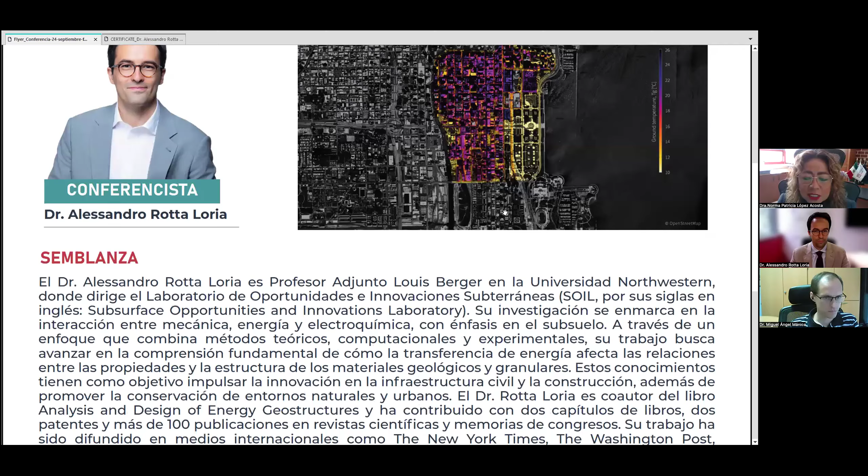I will read the bio of Dr. Rotta Loria. Dr. Rotta Loria is Associate Professor and Louis Berger Professor at Northwestern University, where he leads the Subsurface Opportunities and Innovations Laboratory, or SOIL. His research is framed in the interaction between mechanics, energy, and electrochemistry, emphasizing the subsoil. He combines theoretical, computational, and experimental methods.

His work is looking for an essential understanding of how energy transfer affects relationships between the properties and the structure of geological and granular materials. This knowledge is intended to drive innovation in civil infrastructure and construction, in addition to promoting the preservation of natural and urban environments.

Dr. Rotta Loria is co-author of the book Analysis and Design of Energy Geostructures. He has contributed two book chapters, patents, and more than 100 publications in scientific journals and conference proceedings. His work has recently been spread out in international media such as the New York Times, the Washington Post, Financial Times, Scientific American, CNN, BBC, United Nations, Forbes, and New Republic.

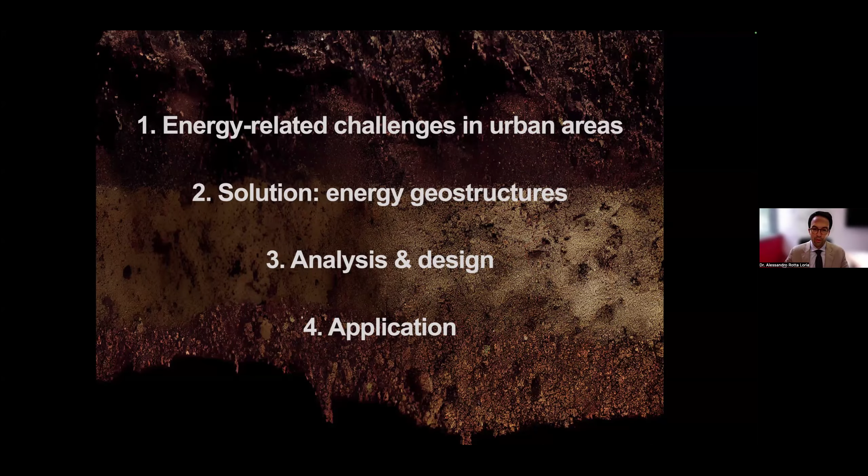So starting with energy-related challenges in urban areas, the message is the following. So you all know that, as a result of rising global population, we need more and more energy. What you may not know, though, is that most of the energy that we actually consume in buildings is for space heating and cooling and hot water production. In fact, depending on the country, from 40 to 70 and even 80% of the energy that we use in buildings is actually used for heating, cooling, and hot water. In the context of Chicago, where I live, as a matter of fact, this percentage is 70%, so even more than 60%.

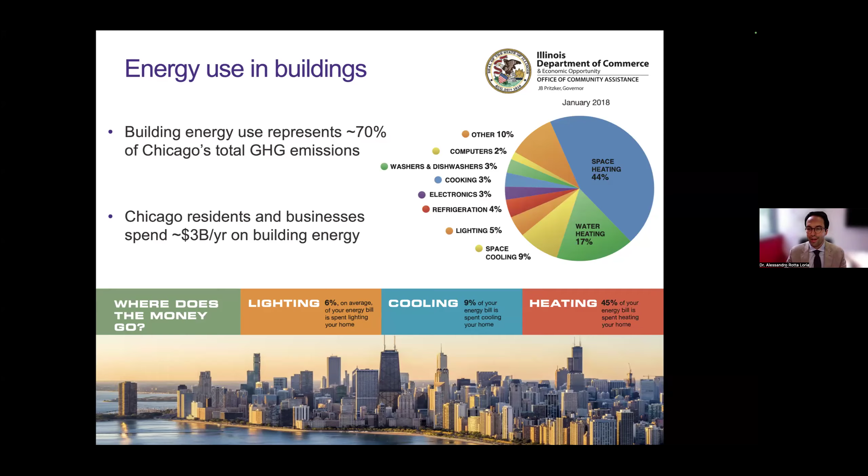And the current practice is problematic because essentially all of this heat typically comes from non-renewable energy sources, and that has as a direct consequence the generation of CO2 gas that then leads to global warming and climate change. Now, of course, we can produce heat with electricity, and so this is why we are trying to electrify our world. But as a matter of fact, if we could use directly heat, it would be a much more efficient way to meet these thermal energy needs. And so the first remark that I would like to convey is we need substantial amount of energy, and specifically thermal energy, typically above the ground.

Now, if you look at what we have underground, I'm used to showing these two posters, which I think exemplify very well the concept of geothermal energy, and the concept that essentially beyond a few meters of depth in the ground, the temperature remains relatively constant throughout the year. So these are two posters that were designed by Frederick Herrick for the London Underground, for the Tube, the metro system in London. And back in the 1920s, they were showing how during the hottest days of the summer, it is cooler below. And during the coldest days in winter, it is warmer below.

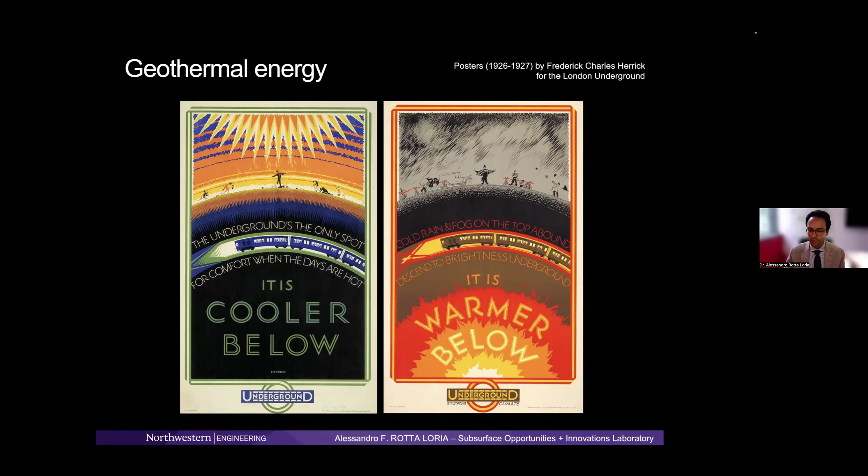And really the message of these two posters is that the temperature in the ground remains relatively stable throughout the year. So it is warmer than the mean temperature during winter and cooler during summer. And this is a reality that you can find everywhere in the world, in principle. So if you dig a hole underground, you're going to find a relatively stable temperature with depth that is going to be approximately equal to the mean annual surface air temperature. For instance, here in Chicago, the annual surface air temperature is approximately 11 degrees Celsius. And so if you dig a hole outside of Chicago, at least, you're going to find 11 degrees Celsius.

Where I was living before, and where I obtained my PhD, in Switzerland, in Lausanne, for example, the annual surface air temperature is 13 degrees Celsius. And if you dig a hole underground, you're going to find more or less 13 degrees Celsius, and so on and so forth. In Mexico City, very likely you're going to find a higher temperature because the average annual surface air temperature is going to be higher. So the concept is that despite the actual value of temperature changing depending on where you are, what does not change is that this temperature is relatively constant throughout the year. And so this is really the operational principle behind all geothermal technologies.

Now, what I just told you is a reality, it's a fact, it's true everywhere, except nowadays if we consider urban areas. Because in fact, when we are in urban areas, nowadays we find so-called temperature anomalies. And so the idea is that as a result of anthropogenic activity, and specifically as a result of the operation of underground infrastructure, the braking of trains, the presence of urban commuters, and the presence of heat sources, the ground beneath cities is warming up. And so this is the so-called phenomenon of subsurface urban heat islands.

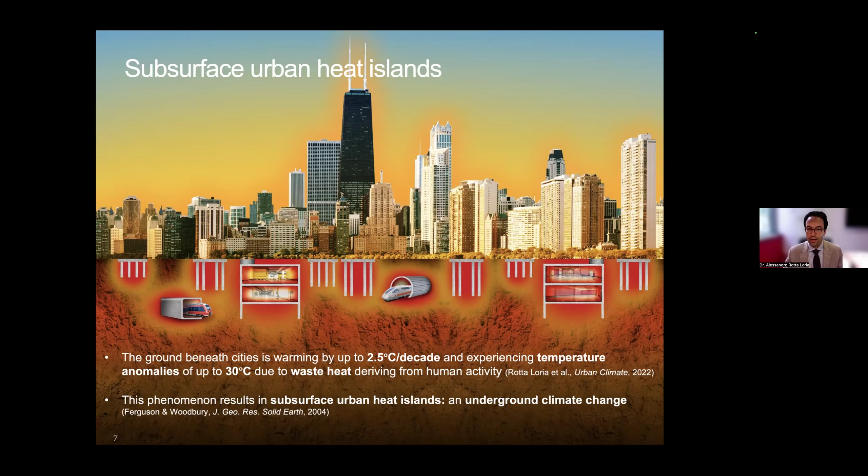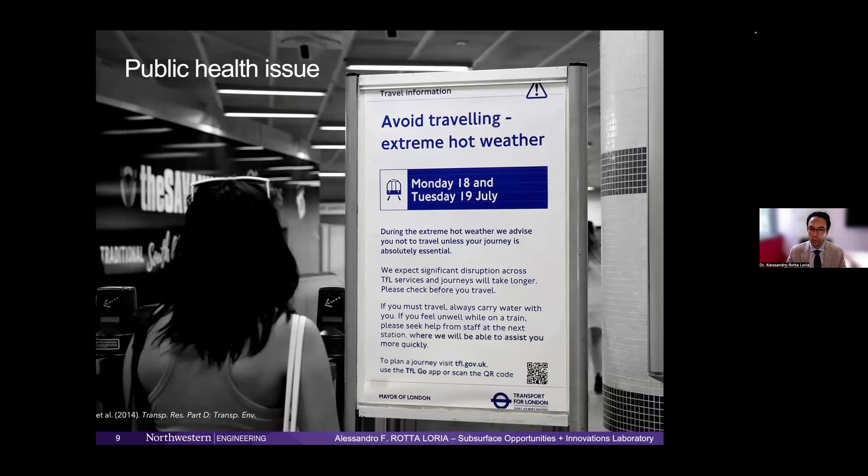Now, underground climate change is a recognized environmental issue because in a number of cities, it's affecting the environment by influencing seed germination, plant growth, and affecting biogeochemical cycles. It is also a public health issue because, for urban commuters, not only can they experience thermal discomfort, but they can also experience heat-induced diseases such as asthma and heat-induced stroke. And there are recorded cases every year about this influence of extreme heat underground on urban commuters. It is also a transportation infrastructure issue because it can be so hot underground that oftentimes the rails of trains can be at the onset of buckling.

And so basically trains need to slow down or even stop, with costs associated with delays. And also heat can lead to an accelerated aging of infrastructure. But despite these renowned consequences of this extreme underground urban heat, before my group and I started to work in this field, we didn't really know what the effects of underground climate change on civil infrastructure, for example, on geotechnical structures, could have been.

Now, the idea is that, as you might expect, geomaterials, so soils, rocks, and concrete, in general, when they are heated up, they expand. And this is kind of what we would expect rationally. However, in soils specifically, fine-grained soils under normally consolidated conditions, for example, or under particular conditions, they do not expand upon heating, but they contract.

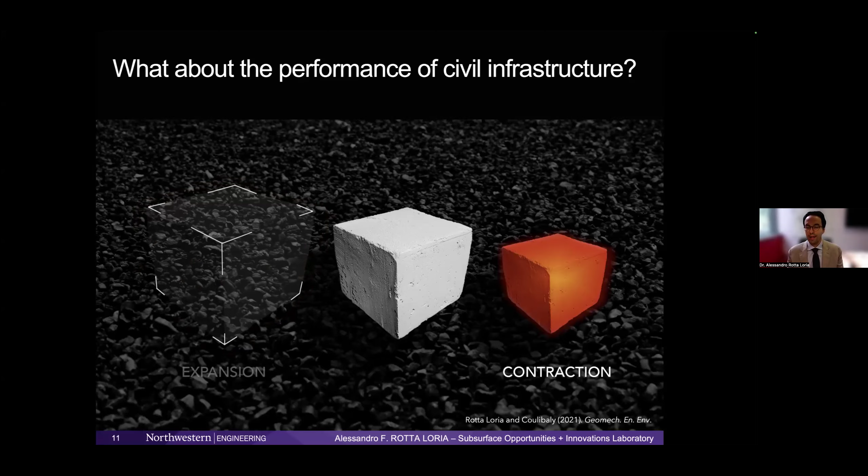And this phenomenon, which has been widely studied in the literature, is oftentimes called thermal collapse. So the idea is that when a fine-grained soil is heated up, instead of expanding, it actually shrinks. It volumetrically shrinks. And these contractions are actually irreversible in nature. So there are plastic phenomena associated with them.

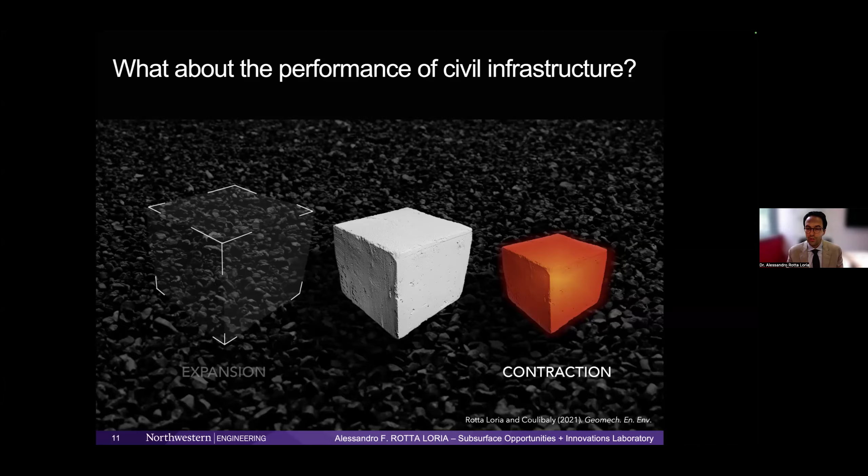And so really, the question at the time was, what's the influence of urban ground warming? What's the influence of underground climate change on the performance of civil infrastructure? So how large are these deformations, and can they represent a problem? So we started to work in this field, and we essentially studied this problem with a focus on Chicago.

And it turns out that underground climate change can represent a problem on a case-by-case basis for the operational performance of civil structures and infrastructures, including, of course, geotechnical structures. And so while we shouldn't be concerned about the safety and the stability of the structure, so we shouldn't be concerned about achieving ultimate limit states, there can be situations where we may actually achieve serviceability limit states, and so states which are problematic for the function and long-term durability of structures and infrastructures. Now, let me be more specific about all of this.

So essentially, what we did as a part of this work was to use Chicago and specifically the Loop District, which is the downtown area of Chicago, as a living laboratory. So due to the proximity of Northwestern to Chicago, essentially the idea was, let's use the Loop District as a living lab, and let's study, first of all, the presence of an underground climate change beneath Chicago, and second of all, whether this underground climate change might have led to substantial deformations.

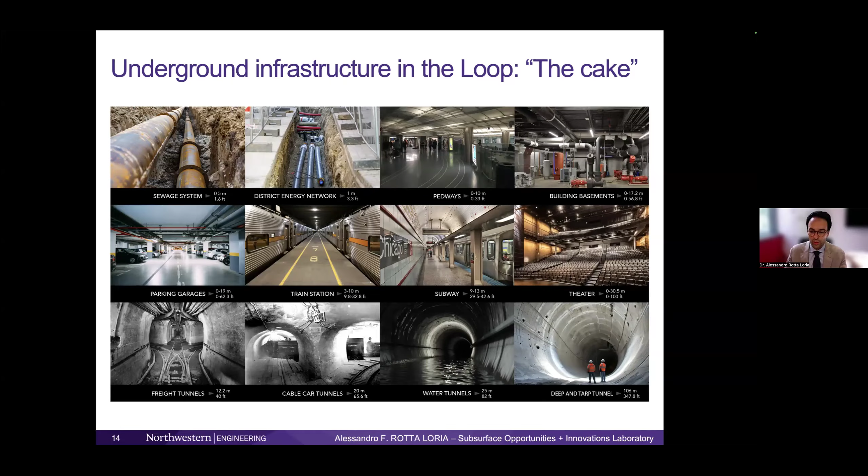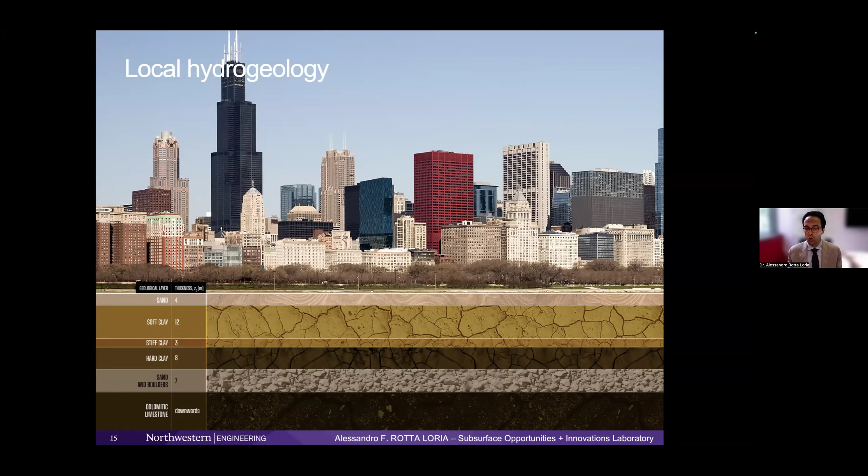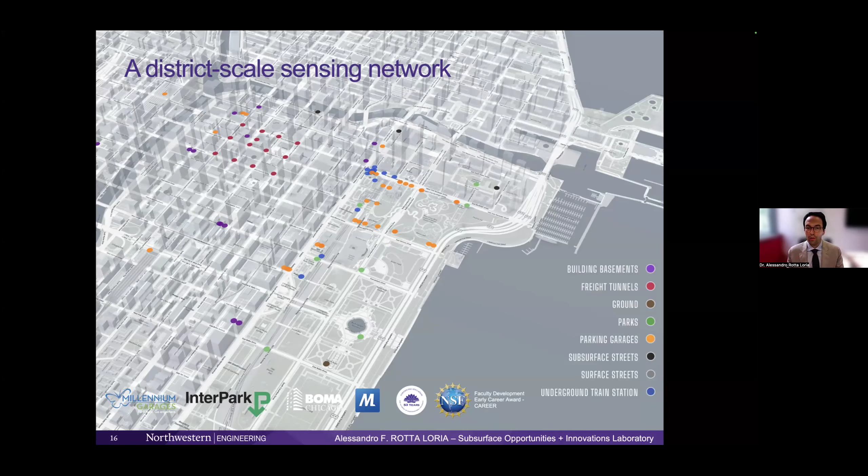So what we did as a part of this study was to deploy more than 100 temperature sensors downtown to really measure, on the one hand, the temperature that characterizes these underground environments, such as building basements, parking garages, and so on and so forth. And on the other hand, we wanted to also quantify what's the temperature really in the ground itself. And so here you have an example of the sensors that we deployed underground.

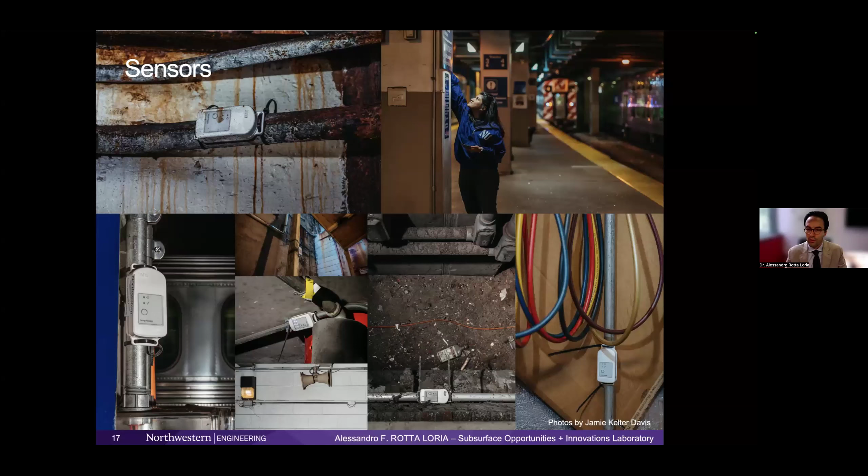And we really deployed them in myriad environments with the ability to gather more than 20,000 temperature data per day. So we literally transformed the city of Chicago into a living laboratory. And here you can see, for example, what these readings tell us. So essentially, since 2019, we have been able to collect temperature data for downtown Chicago every day, every hour of the day, and really to monitor what is happening in the city.

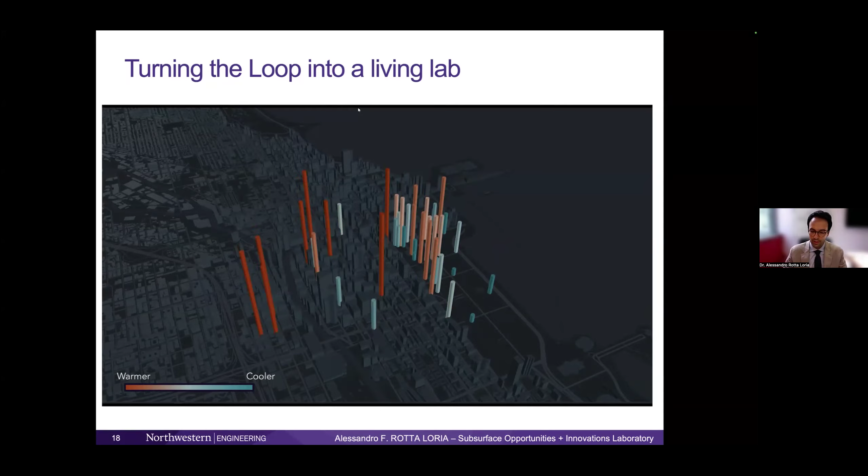So what this data allows us to assess is that Chicago, like all cities worldwide, is experiencing an underground climate change. The ground beneath Chicago is warming up and has warmed up. And so really the question was, what's the influence of these temperature variations on ground deformation? We know that all materials deform when subjected to temperature variations. So the question was, what's the influence of these temperature variations on ground deformations and the interconnected performance of civil structures and infrastructures?

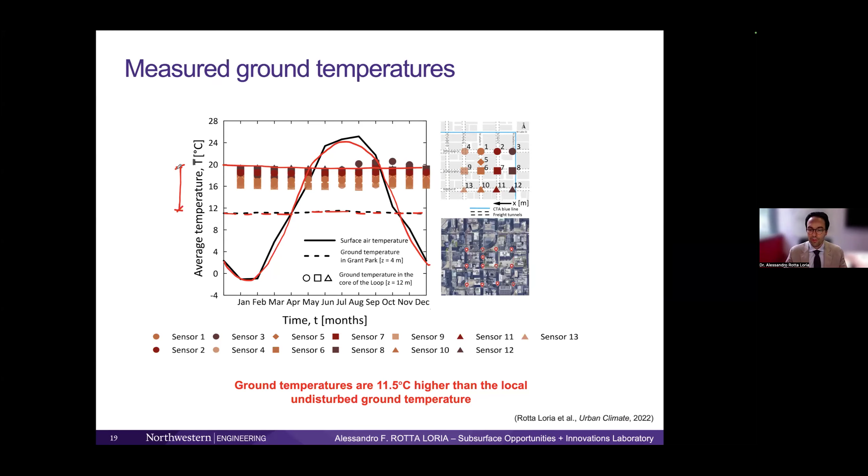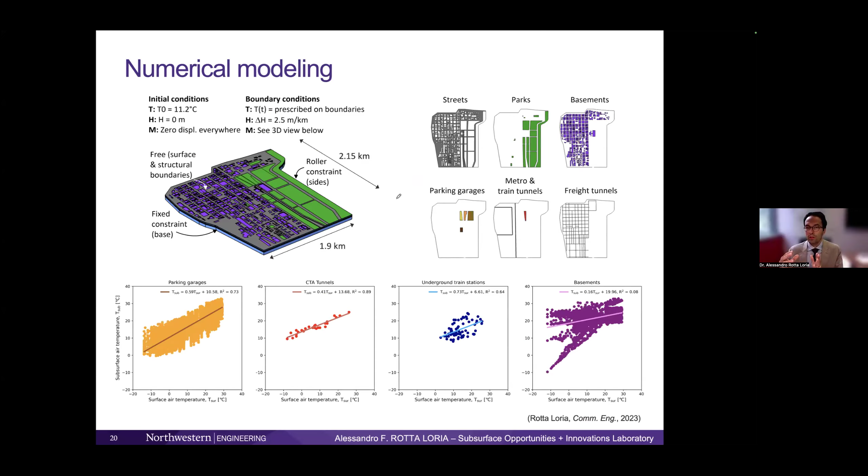So what we did to explore this project with all these underground environments was essentially to simulate the process of heat rejection that has happened in the Loop over the past 75 years, more or less, with the aim to predict what's likely to happen in the next 25 years. So we simulated a time frame of 100 years, starting from approximately 1950 till 2050. Here you can see a comparison between the numerical simulation results, these curves, and the experimental data, these dots and markers. You can see how, without any fitting, we didn't apply any fitting at all in this model, we were able to reproduce the process of heat diffusion in the underground. We were able to simulate how much heat has diffused over time in the underground beneath the Loop, and to validate the capability of our model to reproduce this problem.

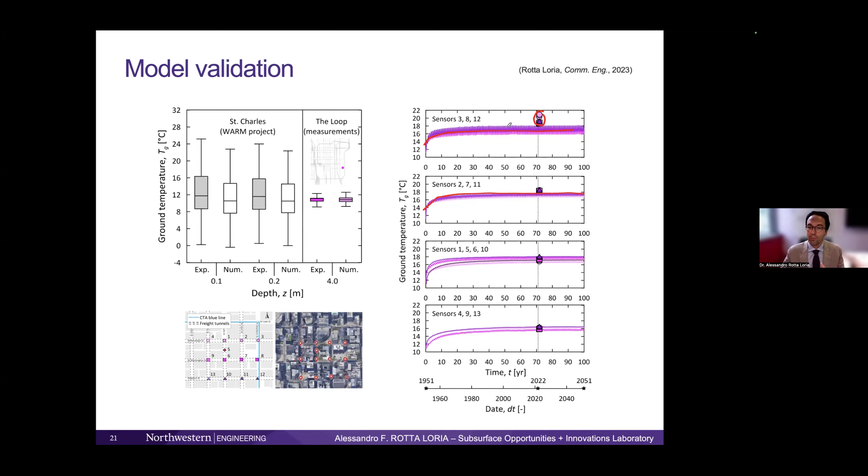Now, before I told you that some soil layers in Chicago are normally consolidated and others are over-consolidated. And so what has happened, is happening, and will continue to happen over time is that some layers of ground are contracting, essentially shrinking over time, whereas other layers, typically the hard clay, the over-consolidated clay, are expanding. So there is a complex interaction between different soil layers that is causing the ground beneath Chicago to move. And when considering the deformation of these normally consolidated deposits, which are shrinking, you may think that this underground climate change is leading to a new or different form of land subsidence, because that's at the end what all of this is.

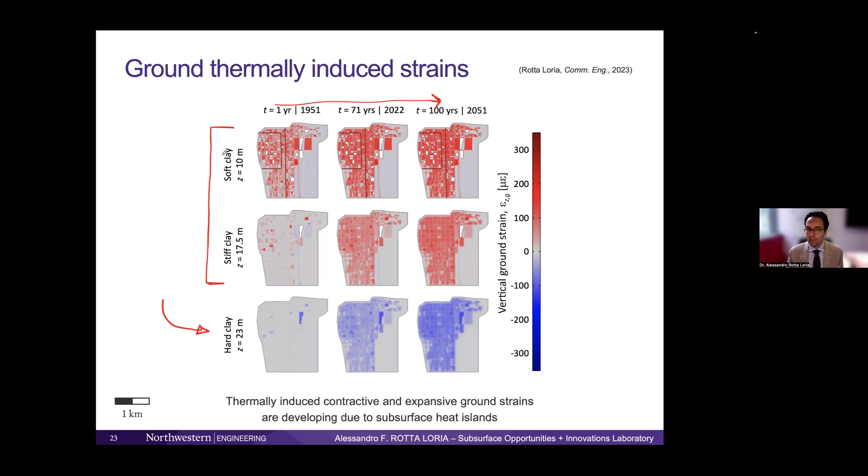We're talking about displacement of centimeters that, of course, have developed over a long time frame. We're talking about 100 years, but still they have developed over time. And so essentially, based on the magnitude of this displacement, we have postulated that some of the operational issues that have been documented in Chicago over the past decades might have been exacerbated by this underground climate change. So of course, it's difficult to speculate, and actually we don't want to speculate, but at least based

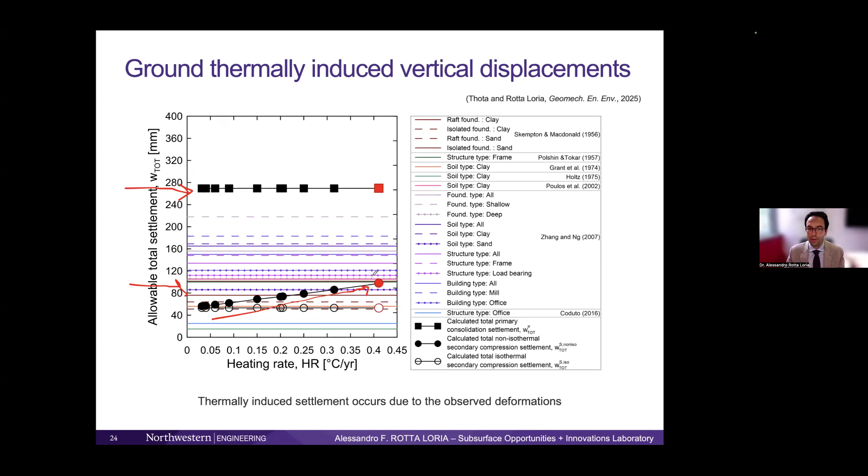on the order of magnitude, we can say that in our opinion, these displacements are large enough to potentially represent a problem for, again, the function and the long-term durability of structures, because they are of several tens of millimeters, they are of several centimeters. And so they're something that is non-negligible. And it's something that is caused by this underground climate change and this rising urban ground warming.

Now, before I go to the next section of the presentation, I would like to stress how, again, the phenomenon of underground climate change characterizes all cities worldwide. As soon as we build a construction, there is going to be an interface with the ground. And no matter how well insulated that building is, there will be some heat that will leak into the ground. There will be some heat that will diffuse in the ground. So really, underground climate change is an endemic feature of our presence on Earth and of really anthropogenic activity and our construction on Earth. All cities, this study was focused on Chicago, but right now we're working on the city of Boston. We have worked on the city of Lausanne in Switzerland and other cities worldwide, and essentially all of them experience this underground climate change.

And clearly, a city like Mexico City definitely has a subsurface urban heat island due to the myriad of essentially buildings that constitute the city. Now, how can we mitigate these phenomena? Well, essentially, there are two ways.

Before I describe one, I would like to say that, of course, the best and most efficient way to mitigate underground climate change is to improve energy efficiency by thermal insulating underground building enclosure. And so basically limiting the amount of heat that is released at the source. So by thermal insulating underground building enclosures, we can essentially limit how much heat is released in the underground. And so we can limit really the intensity of this underground climate change.

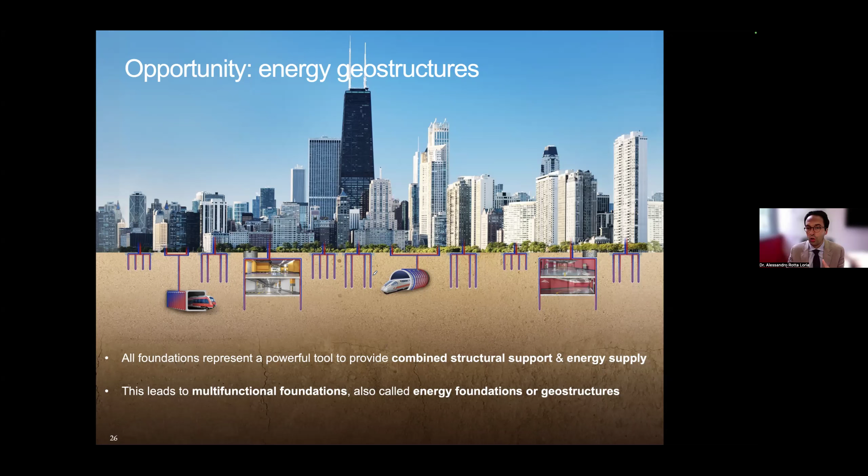And the idea, before I go ahead, sorry, is that essentially with these technologies, you can absorb not only the geothermal heat that is present underground, but also the waste heat that we are releasing and bring it up where it's needed in buildings. And so meet our space heating and hot water production needs on top of cooling needs. So here you have an example of what energy piles can look like. So it's nothing special to some extent.

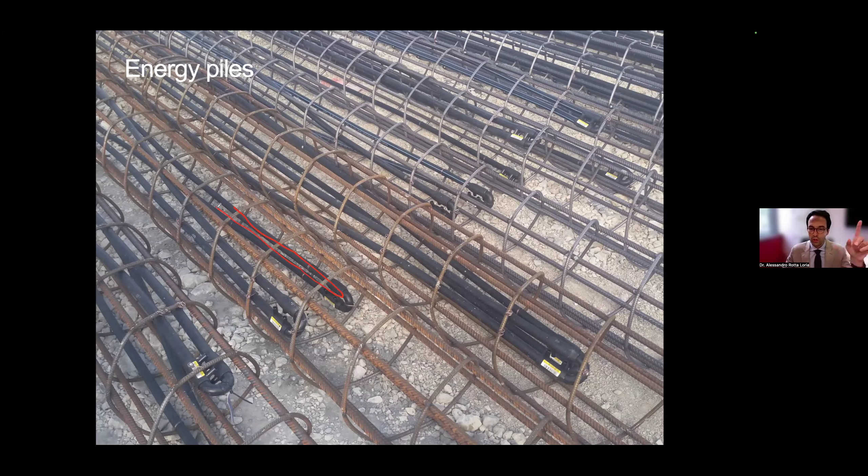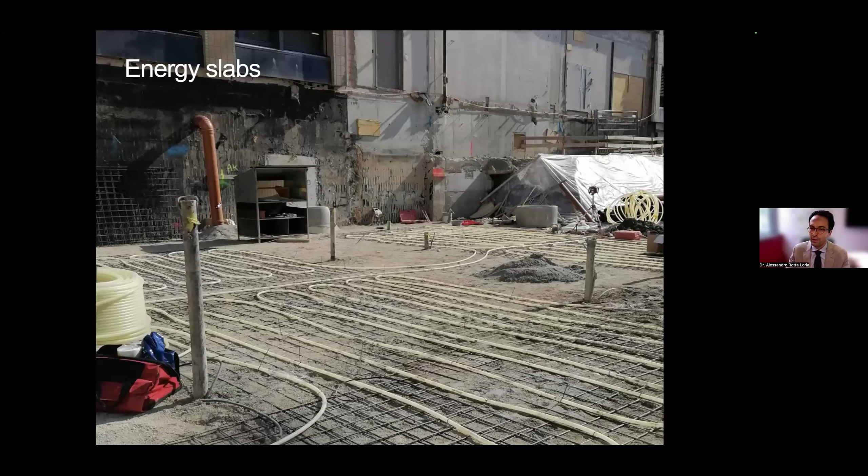So clearly you can deploy these pipes within the base slabs of buildings. You can deploy the pipes also within retaining walls, like in diaphragm walls, for example. So you can thermally activate these structures. And here you have examples of segmental linings, which essentially are transformed into energy segmental linings or energy tunnels in general.

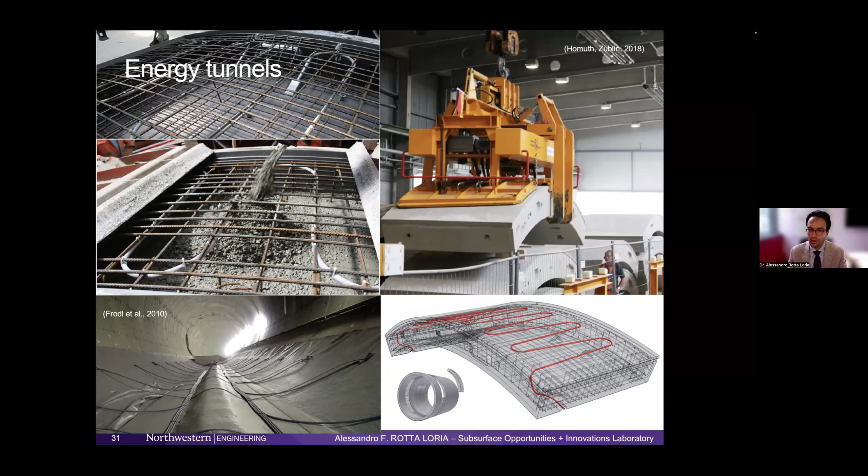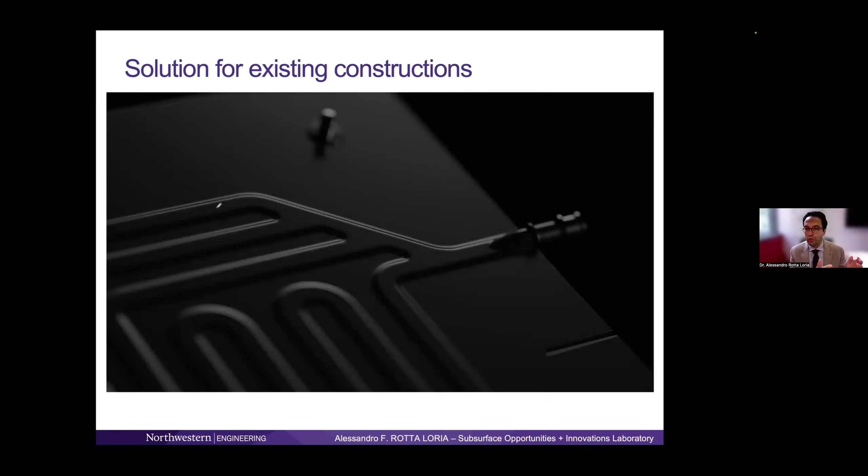Now, the limitation of traditional energy geostructures is that they are only applicable to new construction. Classically, we needed to build these structures in order to be able to put the pipes in. So to overcome these limitations, together with my collaborators, we have invented essentially the world's first geothermal panel called EnerDrape,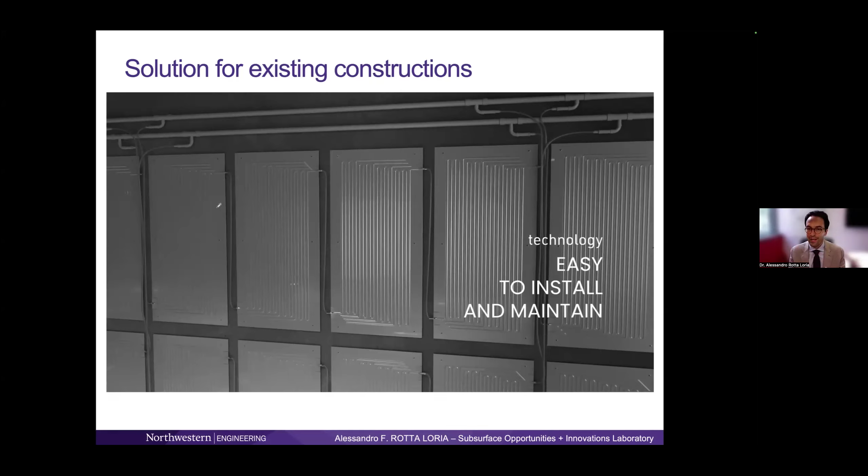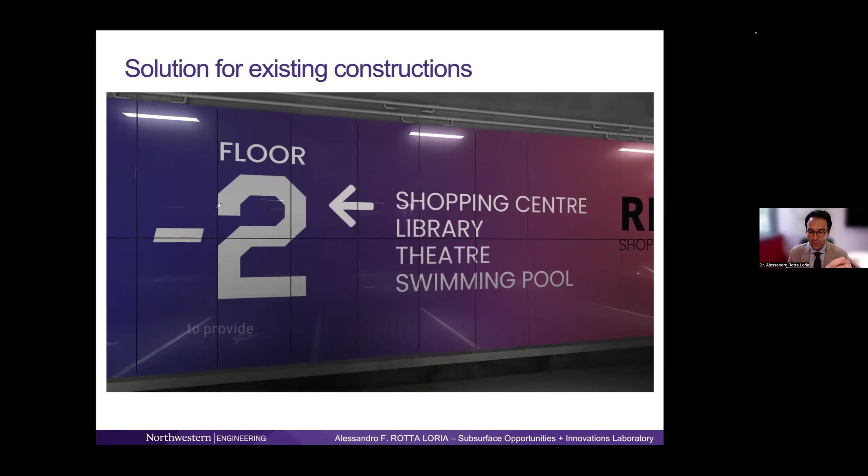which is a panel made of aluminum alloy that can be installed on the inside of any underground space, typically on walls. It is also provided with customized and customizable panels for advertisement and so on and so forth. But really, the idea is that it can transform existing structures into energy geostructures.

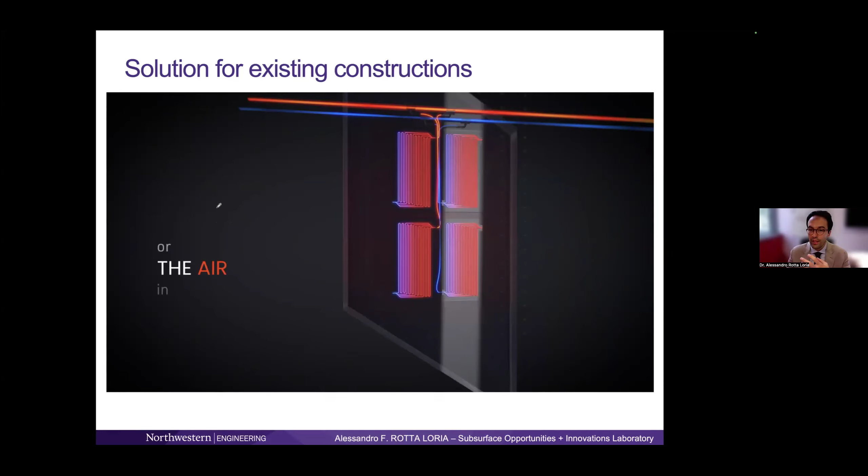And like all other types of energy geostructures, it allows us to absorb heat from the ground and also from the air that circulates in underground environments, and that typically embeds waste heat. The idea is that this system is connected to a heat pump, and this heat pump will provide the heating and or cooling to buildings or infrastructures.

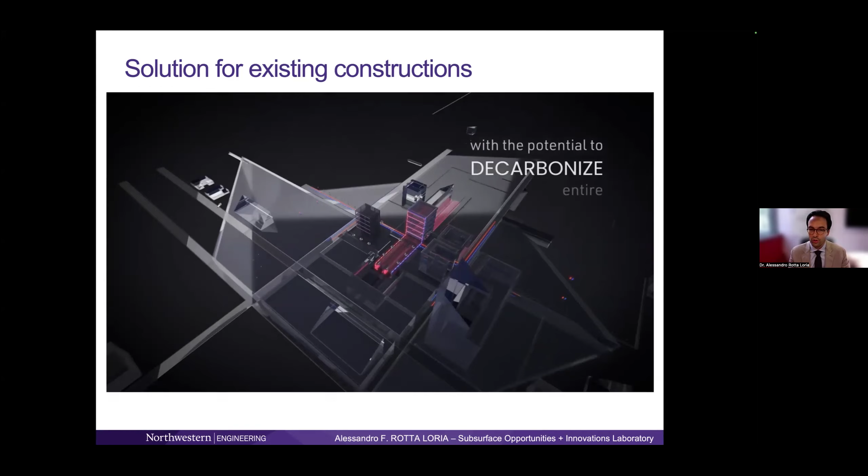So really, the idea is to transform all kinds of underground constructions into energy sources to contribute to the decarbonization of buildings and to the clean energy transition of cities, irrespective of whether underground constructions already exist or not. So the key take-home message is that energy geostructures can be deployed both in existing buildings and in new buildings.

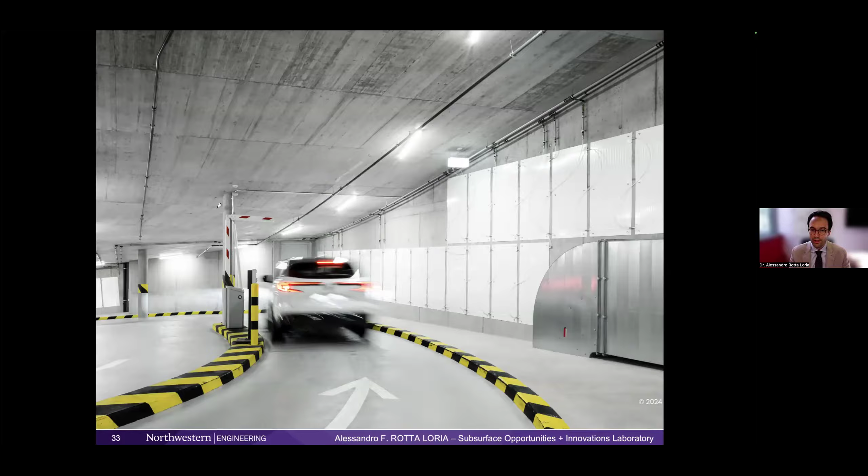Here we have an idea of what the actual panel looks like. It's been deployed in a parking garage. You can see all the panels connected with each other. And this is the same installation, just with these finishing panels on top that protect the panels from external perturbations, let's say.

Now, what can we use energy geostructures for? Well, as I told you, you can use them for space heating and cooling, and hot water production. You can also use them to de-ice structures, so to avoid the formation of ice and snow, which can be very useful, for example, for the decks of airports, like airport runways, or even for sidewalks and roads.

Importantly, they can also be utilized for thermal energy storage. So the idea is that you can use the ground as a thermal battery. At the same time, when implemented in tunnels, for example, they allow us to reduce ventilation requirements in tunnels. And as I anticipated before, they can also be used for thermal networks.

So the idea is that if you're dealing with a tunnel and you turn it into an energy tunnel, you can transform that asset into an energy producer. So essentially, the tunnel can start harnessing energy not only for its own use, but also sell it to consumers, to real estates or energy contractors, or in any case, people who have interest in purchasing energy because they need it or they want to sell it again.

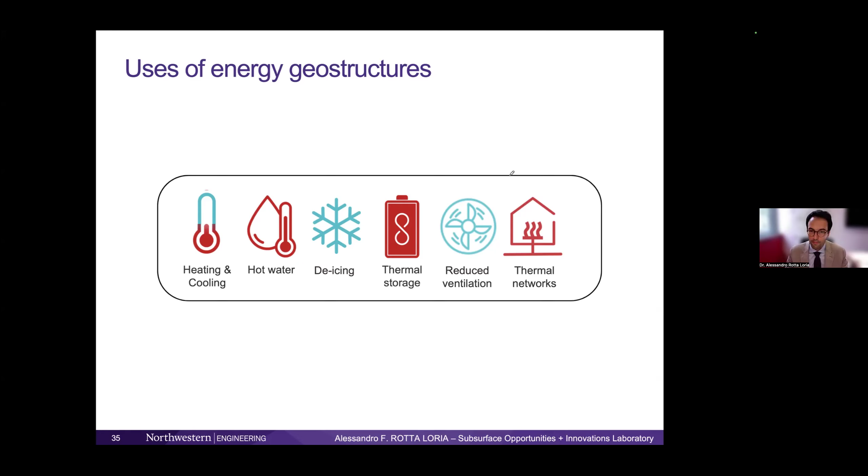The operational principle of energy geostructures is the same as all traditional geothermal technology. You have a primary circuit underground that is connected to one or more heat pumps, which is a device that converts mechanical energy into heat. And then you have a secondary circuit in the building that essentially delivers the heat. So really here, nothing is different.

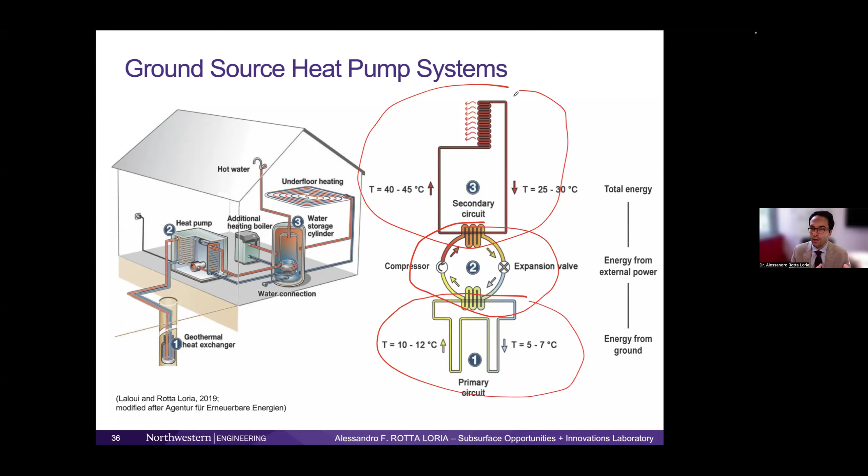The only difference is that instead of drilling a hole next to a building, and so instead of installing a geothermal borehole, we integrate those heat exchanger pipes into geotechnical structures and underground constructions, which means that there are cost savings involved, because essentially we would have already built those structures in any case. So we don't drill the ground only for the sake of the heat exchange, but we use structures that will be built in any case, and simply provide a new multifunctional role.

And as I told you before, we transform these structures into energy sources, and sources of geothermal heat, which is available 24/7, irrespective of the weather, and everywhere on Earth. So irrespective of whether you are in Mexico, anywhere in the United States, in Italy, in France, in South Korea, or South Africa, you are going to have that heat available. The typical return on investment of these technologies ranges from 4 to 15 years, with an average of 8. So these are typically projects that attract a lot of interest because they make economic sense and they have a number of advantages.

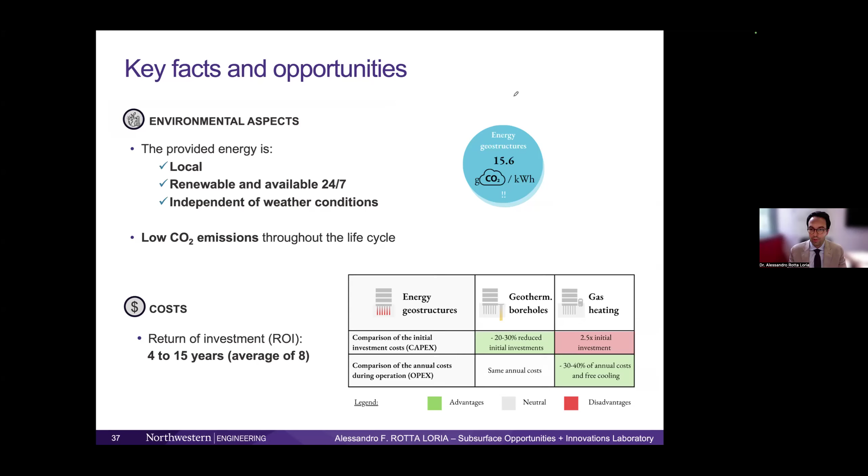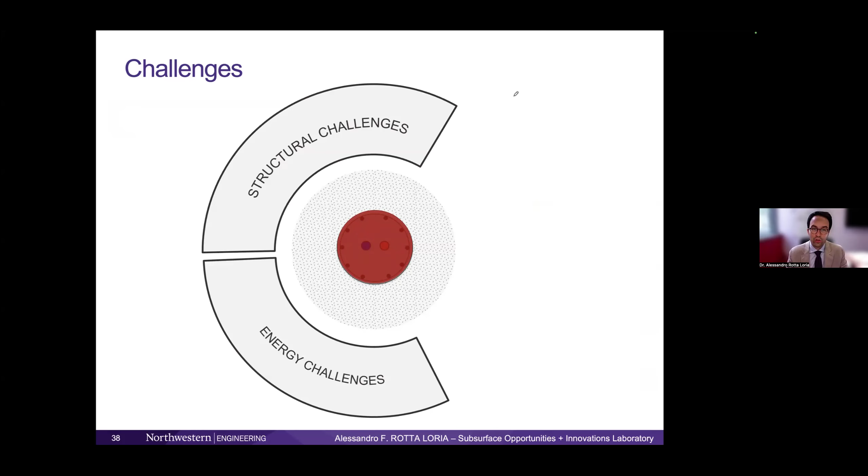Now, from an engineering perspective, what are the challenges that need to be addressed for these novel types of structures? Well, there are energy challenges because, of course, a key question is how much heat can these structures provide? What's the energy that we can harness from the ground? Then, due to the fact that we're going to have temperature variations, a second challenge is a structural challenge, because the question is, what's going to be the deformation of the structure?

Is it going to be, do we need to limit it? To which extent is it going to be important? And then, of course, since they're going to induce temperature variations into the ground, we will have interest in controlling them to avoid unwanted effects, okay? And so today, I will focus mostly on structure and geotechnical challenges given the audience,

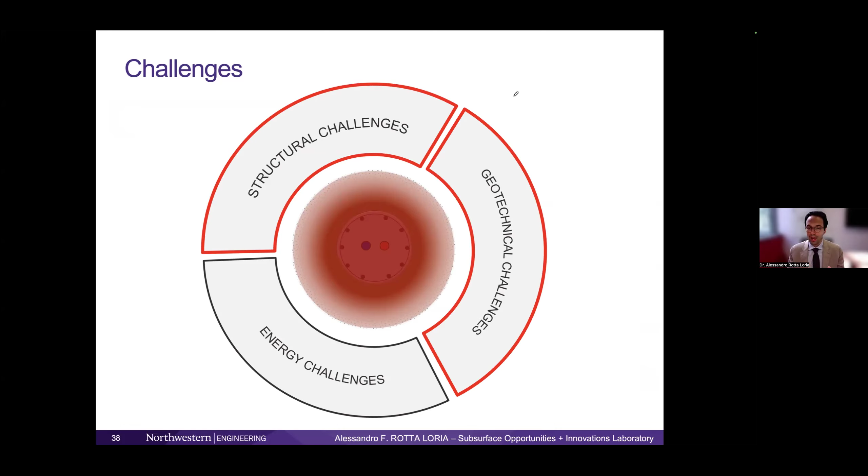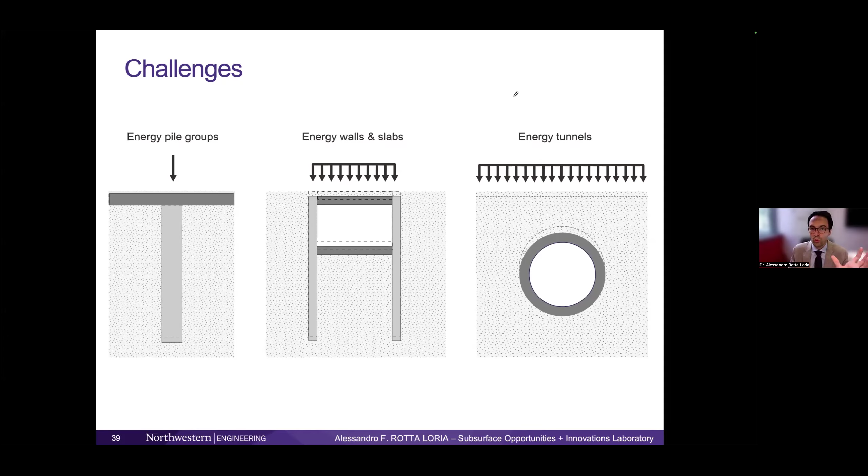although I would say nowadays, there is knowledge about all of these three aspects, and we know very well how to analyze and design energy geostructures. From a high-level perspective, though, really here the scientific question at first and the engineering question later, and now practical question was, compared to traditional underground constructions, how do energy geostructures behave due to the influence of temperature variations? How do they deform, for example?

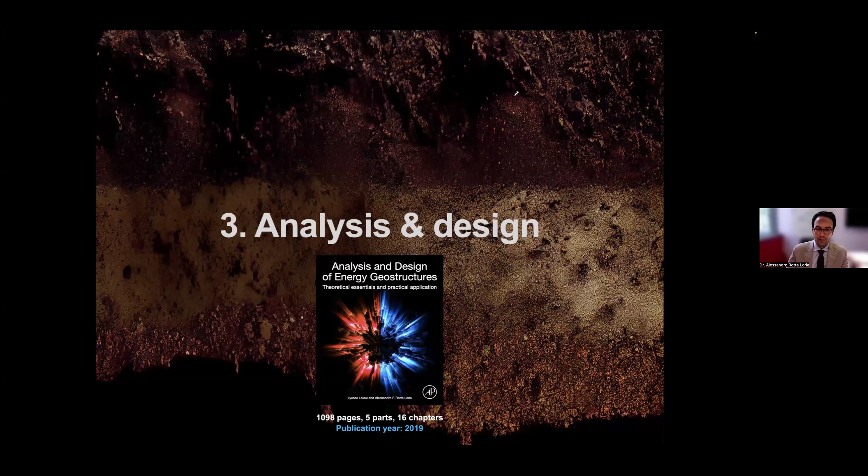And so in the third portion of this talk, I will actually show you the results of some activities, some models that we have developed over the years with my collaborators, which are included in this book, which I had the opportunity to write with Professor Laloui from EPFL, the Swiss Federal Institute of Technology in Lausanne. And that really summarizes all the tools and techniques that we can use to address the analysis and design of these technologies.

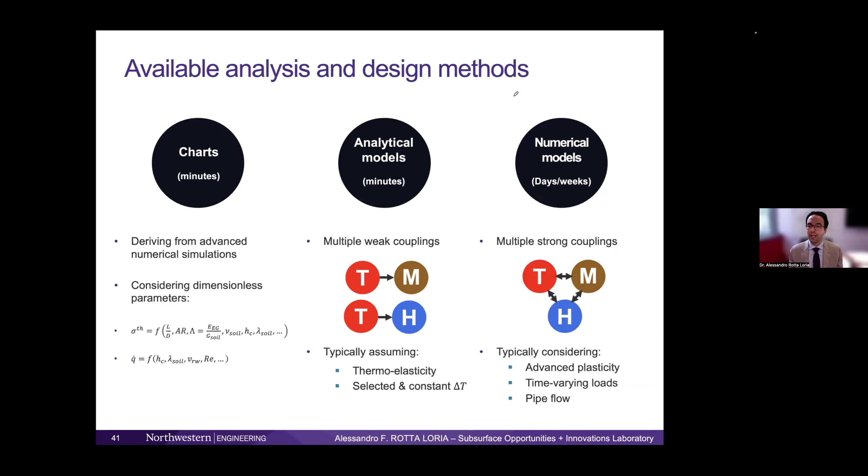From a high-level perspective, there are essentially three approaches as we have them to analyze and design more traditional geotechnical systems. We have charts, so we have developed charts over the years to analyze, typically for feasibility assessments and schematic designs. We have developed analytical models to address the analysis and design of these technologies with hand calculations. And then, of course, there are the more rigorous but more time-consuming numerical approaches that can be used.

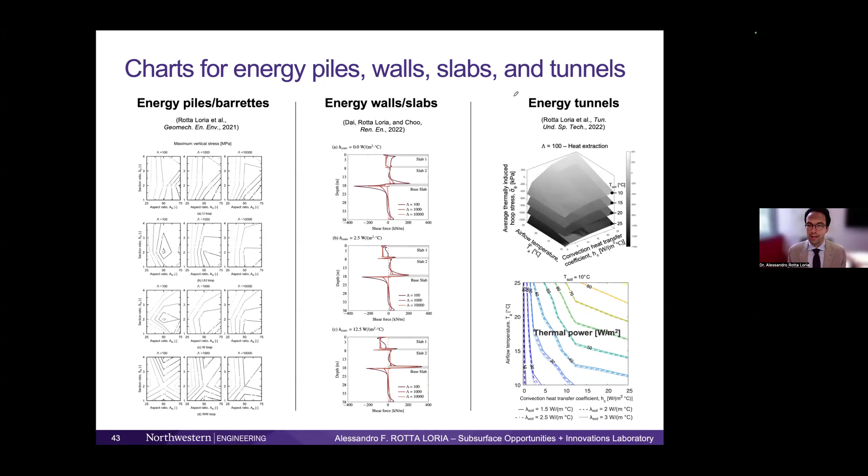So with respect to the charts, the idea is that besides charts that allow us to understand how much power can be harnessed from the ground, the charts that we have developed basically allow us to understand, depending on the site conditions and the geometry of the structures that we're dealing with, what are going to be the thermal induced displacements, stresses and moments and so on and so forth. So these are really graphical approaches through which we can very quickly and easily take values that then we can use for feasibility assessments to understand how to cope with these temperature variations.

With respect to analytical models, essentially what we have done in this field has been to extend very classical analytical models available for the analysis of traditional geotechnical structures, such as the interaction factor method originally proposed and formulated by Poulos and co-workers and Randolph and co-workers, to non-isothermal conditions. So what we have done has been to extend it to non-isothermal conditions to be able to account for temperature variations. We have done the same thing with the equivalent pier method. Also, the Winkler analysis of beams resting on a soil. And lately, we have also extended the classical cavity expansion theory to non-isothermal conditions, really to be able to account for temperature variations for the analysis and design of tunnels.

And so in the following, I will basically fly over the main features of these tools just to show you that basically they exist and they can provide very accurate values of displacements and forces and moments that act on these structures, and they are caused by temperature variations.

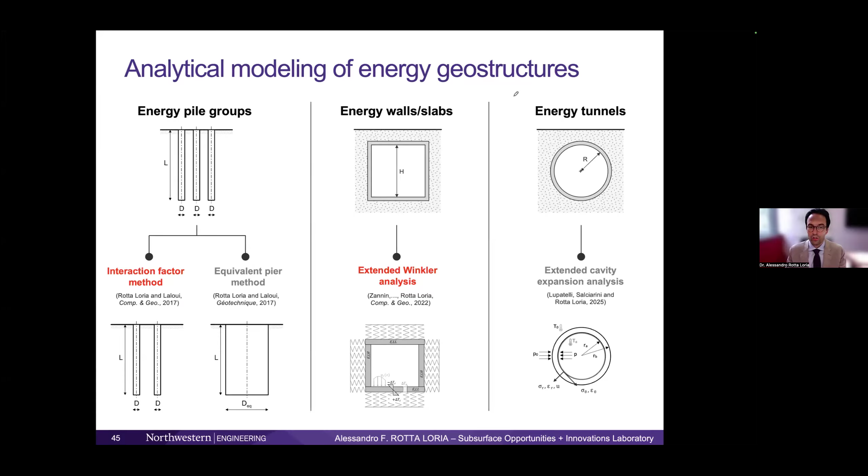So here you have like an overview of what the interaction factor method is. The idea is that this approach aims to address the displacement of pile groups based on the superposition principle. And so by essentially assessing what's the degree of interaction between all the piles in a group through the definition of an interaction factor for mechanical loads and thermal loads. And so here really the main novelty was to determine the interaction factor caused by thermal loads.

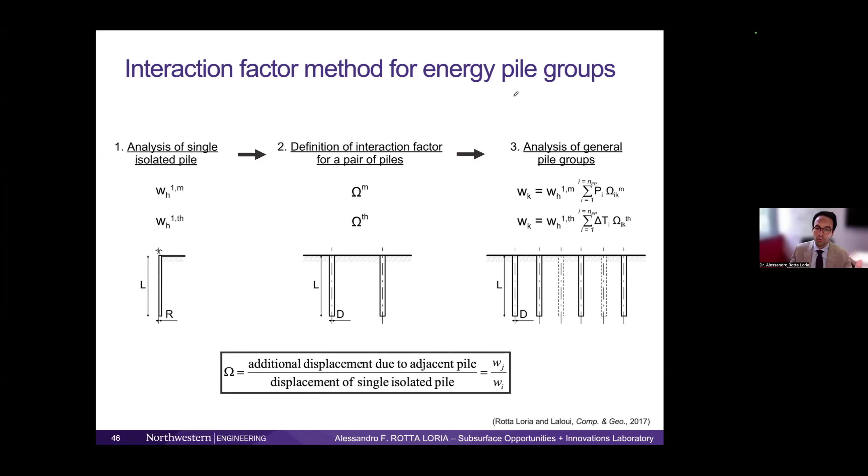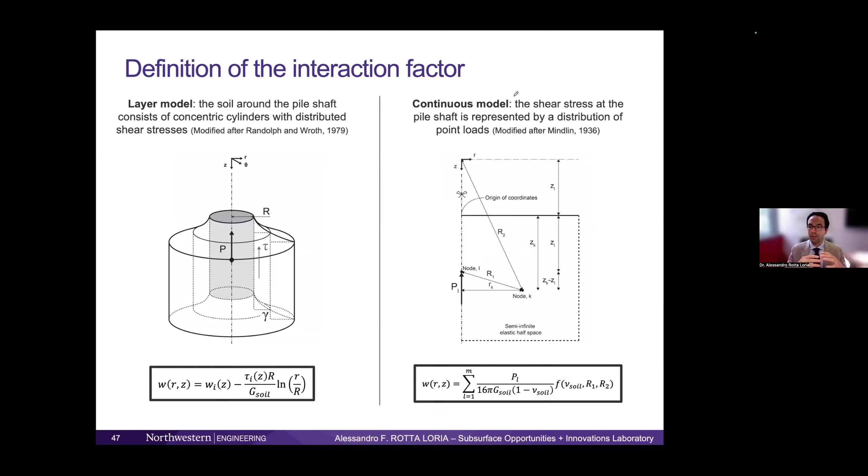For this, we developed like two analytical models that represented extensions of a model originally formulated by Randolph and Wroth and the classical Mindlin solution. But so the idea of these models is that essentially we calculate the extent and the magnitude of the interactions between all the piles. And based on the knowledge of these interactions, we can then apply the elastic superposition principle to calculate what's going to be the deformation of the energy pile group subjected to any kind of temperature variations.

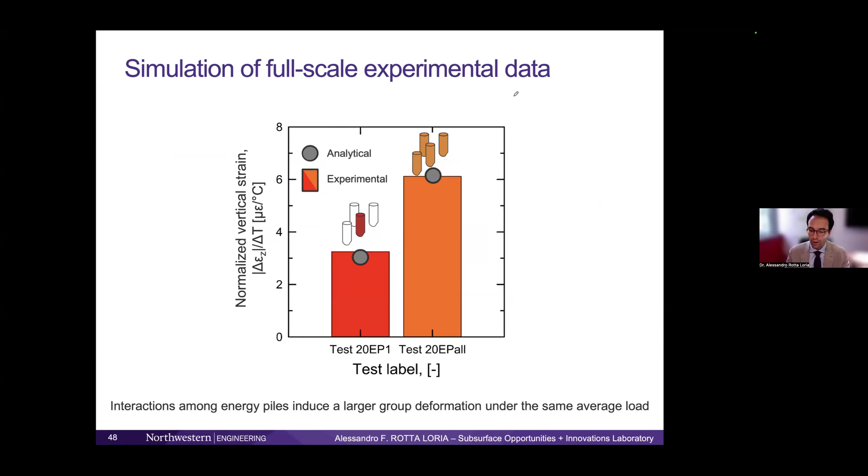In this slide, you can see a comparison between experimental data and analytical data, and you can see how good the results can be. Like, as long as you consider representative material properties, you can really capture quite well what happens in reality. Here you have an overview of what the extension of the classical Winkler solution looks like.

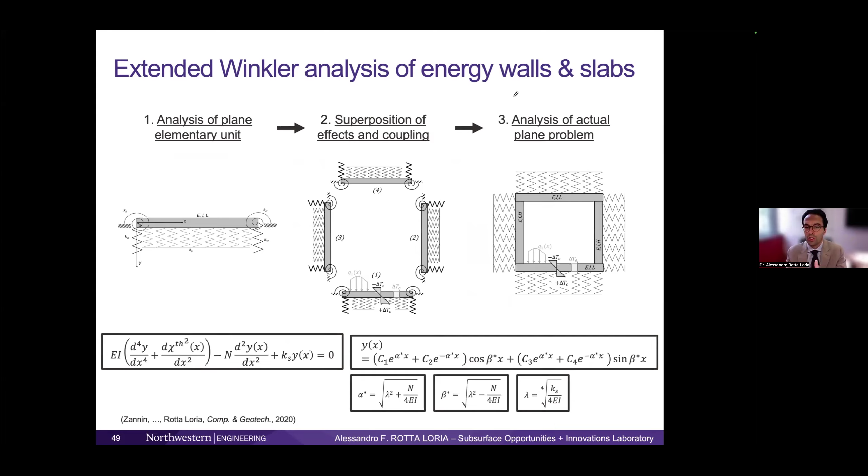And the idea is that it's very similar. The idea is to use the elastic principle of superposition to analyze essentially what's the influence of a given combination of loads on one beam, and then apply the superposition principle to study the interaction between multiple beams that can lead to a plane geostructure, such as, for example, a cut and cover tunnel or a retaining wall or whatsoever.

And here again, like in this slide, you see a comparison between the results of the analytical model and numerical simulations, and you can see how close the results are, meaning that essentially this analytical approach can capture well the effects of temperature variations. And I'd like to stress that for the sake of this demonstration, in this case, we consider just the unitary value of loads, just for simplicity, and so the effects are very minor, but the model, as a matter of fact, can be used to assess the effects of any magnitude of mechanical loads, as long as they remain within the elastic domain.

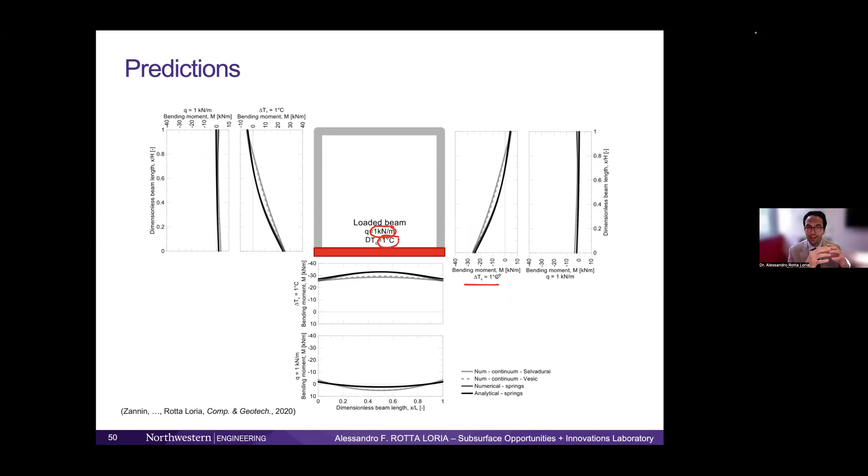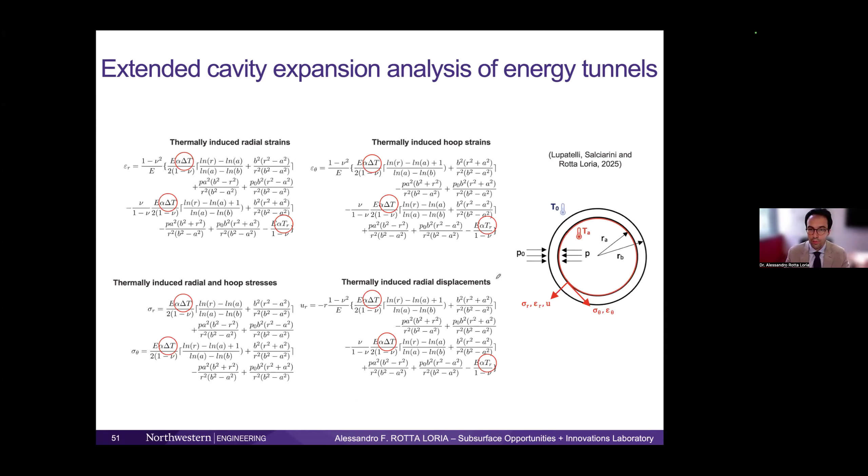And here, last but not least, you have an example of how we extended the classical cavity expansion theory. So the idea is that we included in the mathematical formulation of this very traditional approach the effect of temperature variations. And so nowadays we can actually use it to estimate, for example, what are the thermal induced radial stresses or hoop stresses within tunnels, within cavities, if you want. And again, there is a close comparison between numerical results and analytical results.

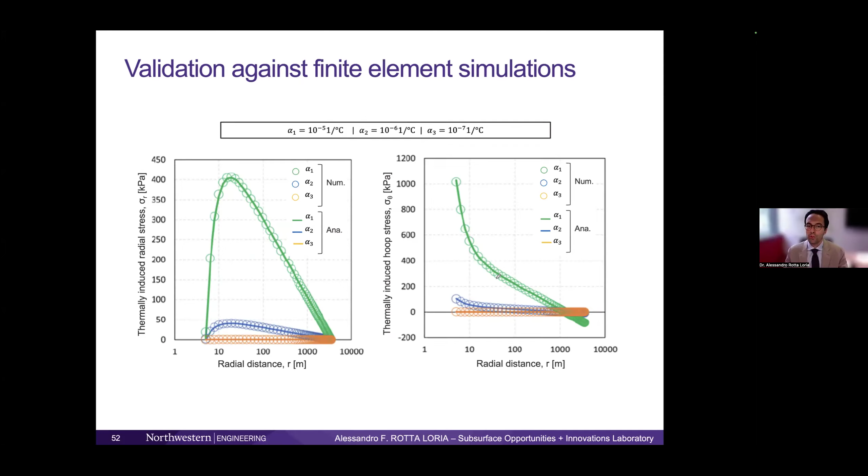Now, as I told you before, of course, the most rigorous approach, although more time-consuming, consists of numerical models. And nowadays, there are a number of formulations, again, thermohydromechanical formulations, that allow us to capture many aspects involved in the heat diffusion process in the subsurface, its impact on groundwater flow, and the impacts also on the deformation. And so these are typically the approaches that are utilized for the detailed design of energy structures.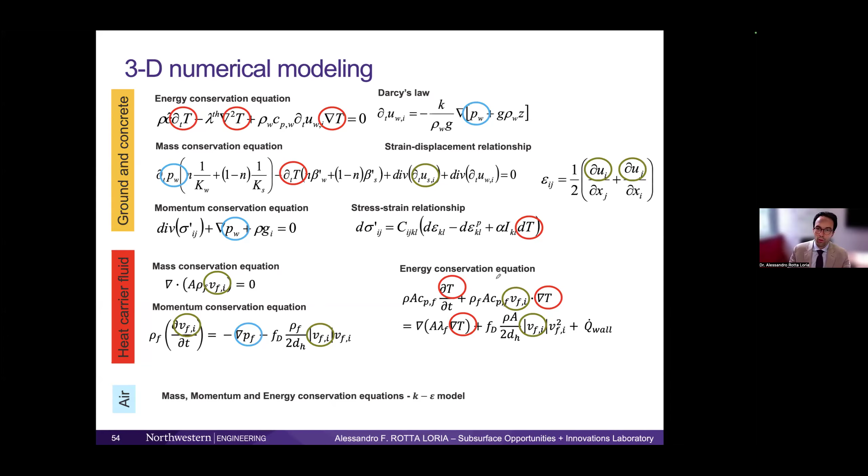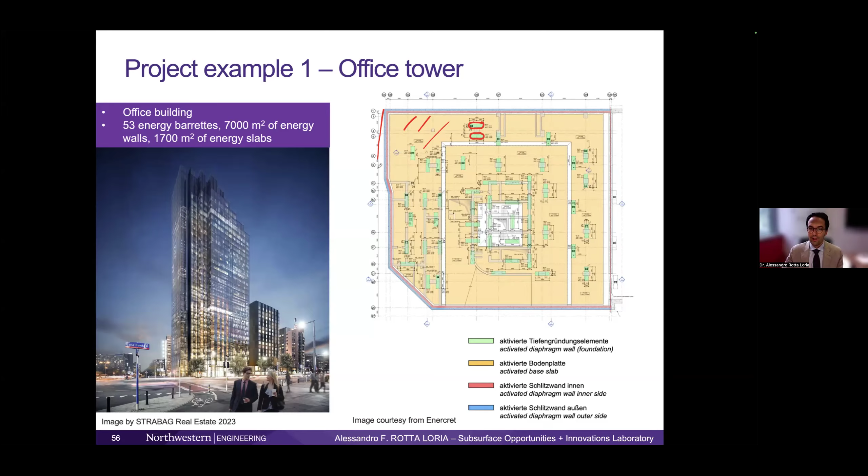To give an example of what are the things that can be done, and I will shortly arrive to the conclusion, I'd like to share with you the results of some projects on which I have had the opportunity to work through a company that I co-founded called GEOEG, that really specializes in the design and implementation of energy geostructures. And as an example, I will take this building located in Poland, which is an office tower, for which basically the base barrettes of the foundation in green were transformed into energy barrettes. The base slab in orange was transformed into an energy slab, and the side walls were turned into energy walls.

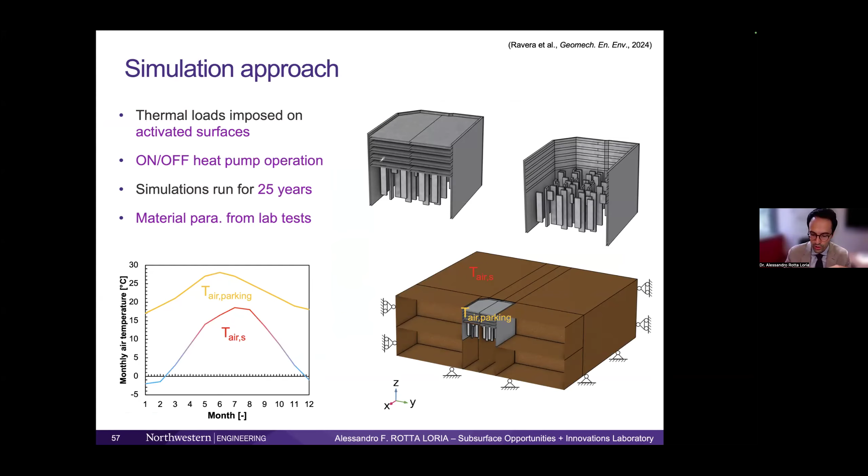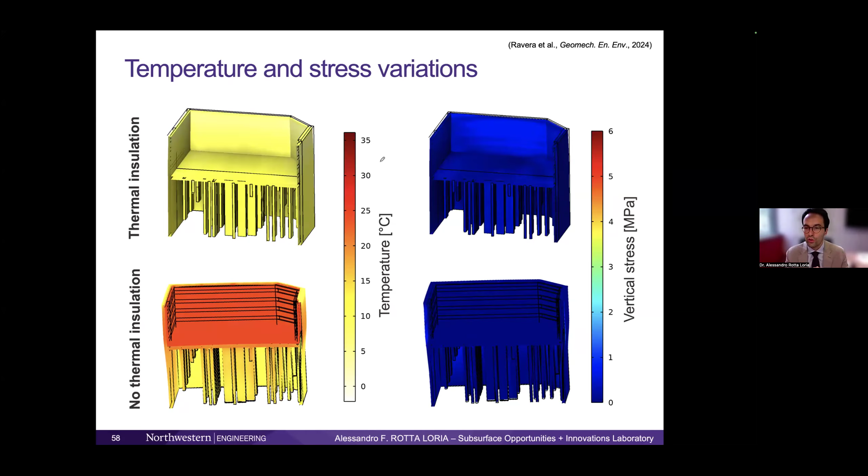Here you can see how these numerical models were used. So essentially, we built a 3D model for the detailed design to really assess the response of these complex structures. And here you have examples of results that really tell us essentially what is the magnitude of the temperature variations and what are the effects on the stresses within the structures. These analyses, as a matter of fact, allow us to really study over time what happens in these systems and to then develop checks at serviceability limit states to ensure that everything will be fine over a given service lifetime and operational lifetime.

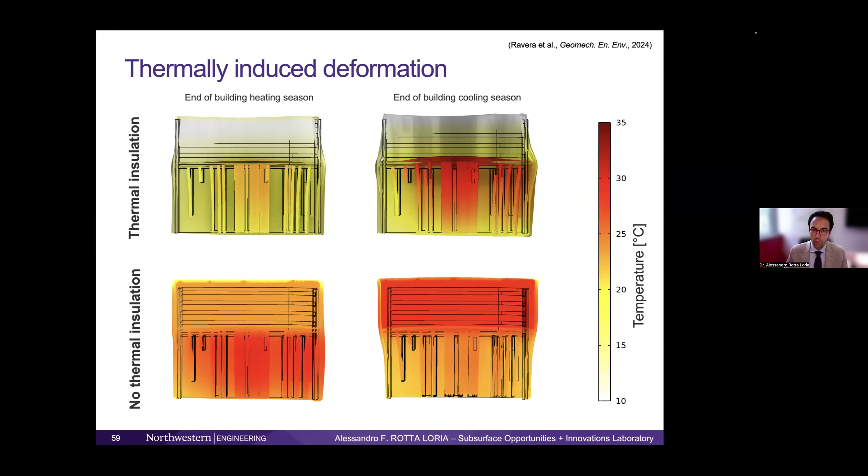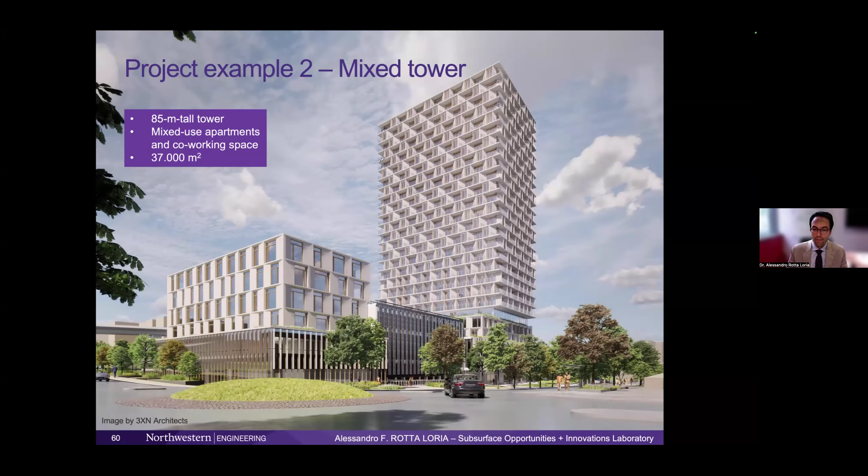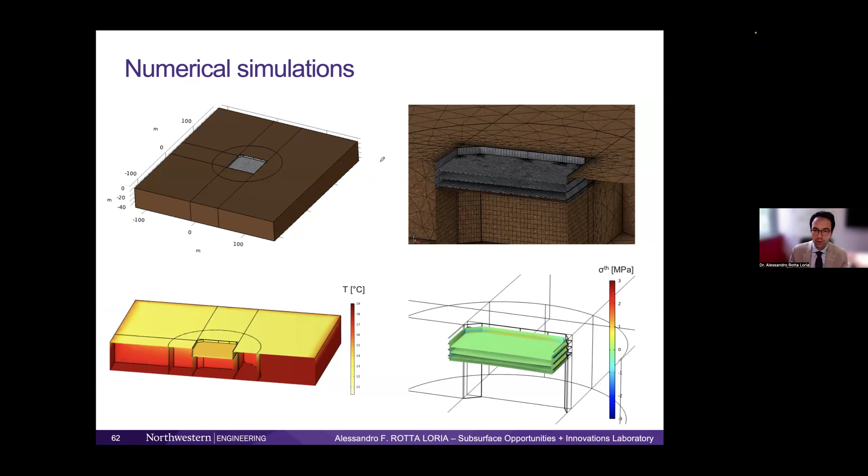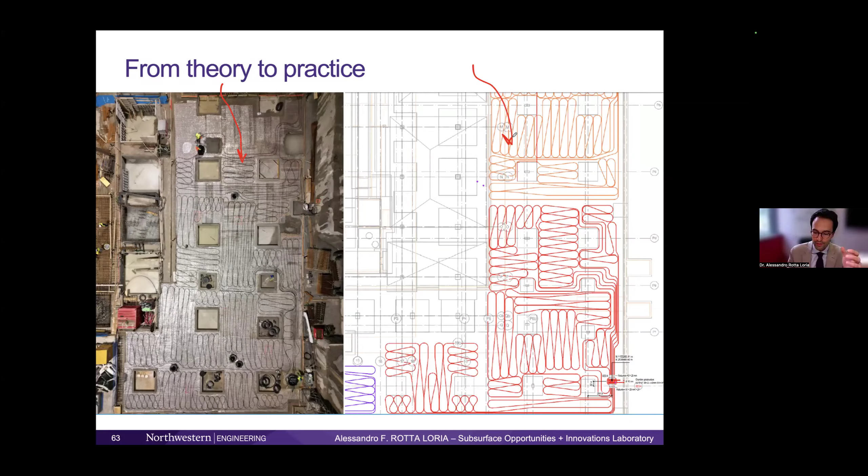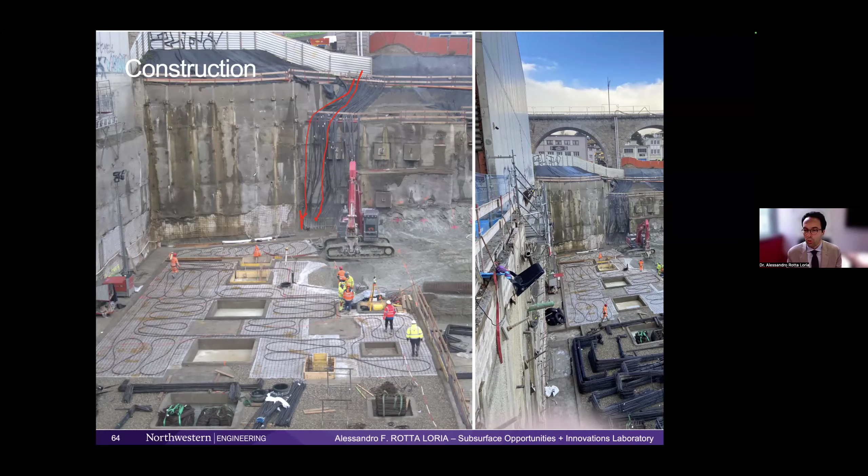So this is an aerial photo of the project with all the pipes, and this is the engineering drawings of the location of the pipes. So really from theory we passed to practice, and we implemented this project in a building that will be very soon put in service and start its operation. So here we can see the construction site. All of these are plastic pipes that then go, in this case, into the base slab and then also in the retaining walls. And so really the idea is that this building will be self-sufficient from a thermal energy perspective, thanks to this energy geostructure system and a complementary system of geothermal boreholes that have been built next to the building.

So to conclude, I guess the message that I want to convey is that the ground beneath all cities worldwide is warming up, and this is due to subsurface urban heat islands that essentially consist of an underground climate change. Now, the good news is that, again, by improving energy efficiency in buildings, by thermal insulating buildings, we can limit at the source this heat, this rejection of waste heat in the ground.

At the same time, an alternative approach is to deploy geothermal technologies, such as energy geostructures, as a means to essentially absorb heat that would be wasted otherwise, and to repurpose it for our own needs in buildings.

So I guess, as the title of my talk suggested from the start, underground climate change, on the one hand, represents a silent hazard, if you want. It represents a threat. But on the other hand, it represents a very big opportunity, because it provides one additional reason for improving energy efficiency in buildings and also deploying geothermal technologies and energy geostructures in particular, which at the time I'm speaking are proven technologies which are affordable, reliable, and characterized by an excellent performance in the long term.